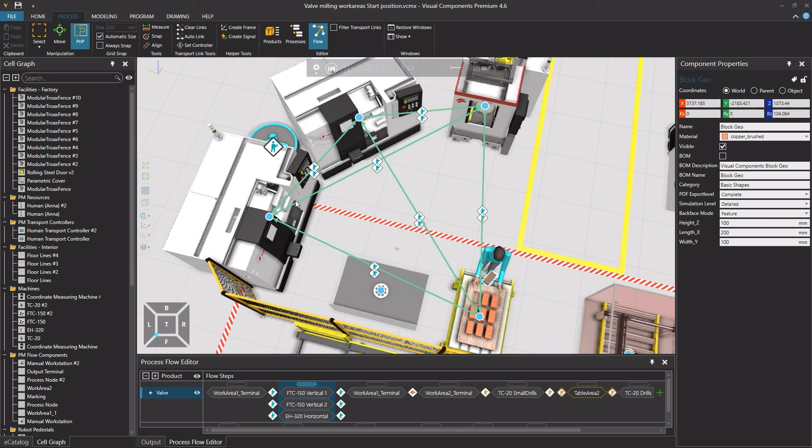Hello, JP here, and welcome to this tutorial to learn about the Assembly Operations tool. The Assembly Operations tool makes building assemblies with robots much easier and faster than before. Let's first take a look at what we have in this example layout.

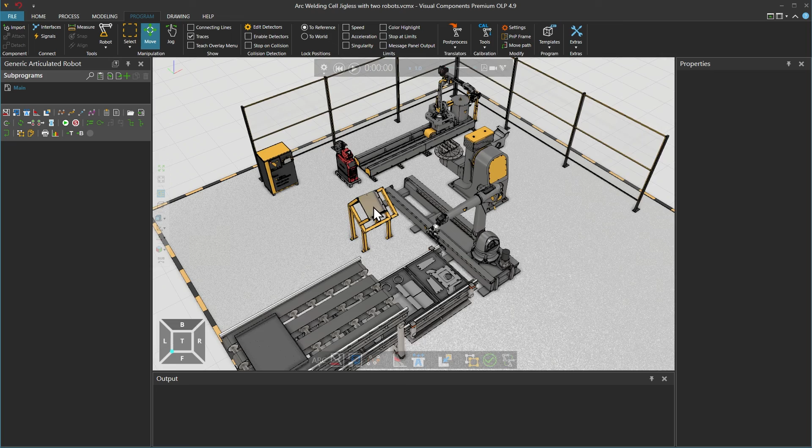Here we have a conveyor which brings these individual parts that we are assembling to this track-mounted manipulator robot. Here on the other side we have a workpiece positioner and a welding robot, which is also mounted on track. And here we have one simple but very important thing, the regrab station, which is basically a table with an angled surface and two edges that stop the parts. And last but not least, here we have the completed assembly that we have imported from a CAD file.

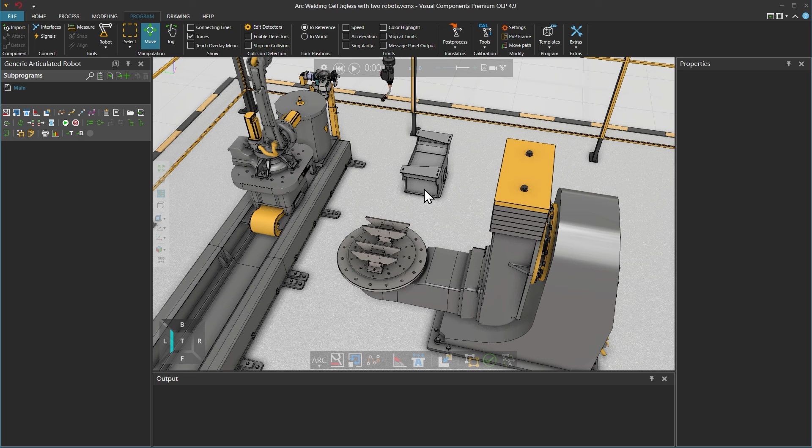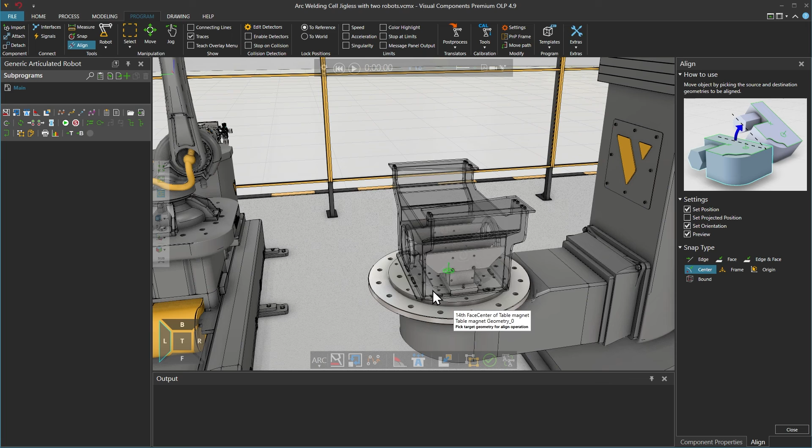Okay, let's then go through some preparation steps that will help the actual assembly operations process. First, we want to position the assembly to the workpiece positioner. So we select the assembly and use the Align tool. From the settings we select Set Position and let's use Center for the snap type. Now when we select the center point of the assembly bottom and the center point of the workpiece positioner's table, we get the assembly nicely aligned to the center.

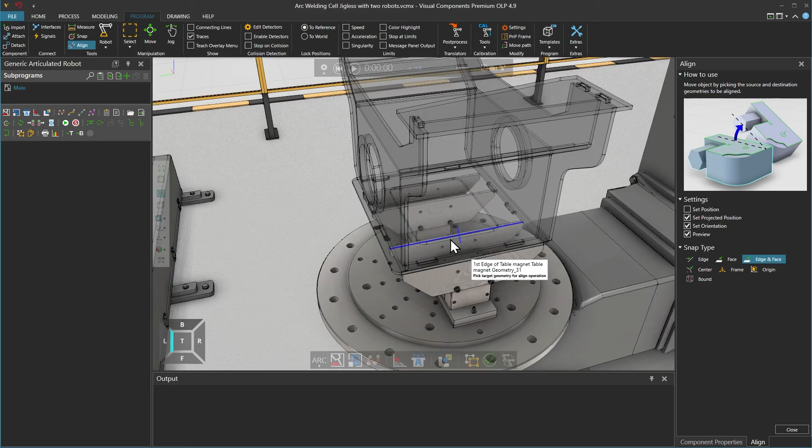Now we'll just have to move the assembly a little bit up and select the Align tool, and from the settings let's use Set Projected Position and Snap Type Edge and Face, and we'll select the assembly bottom and this face here. And it seems to be correctly positioned. Now we can use Attach to attach the assembly to the magnet on the workpiece positioner's table.

Okay, next we will create a new subprogram. Let's call this assembly helper. The idea here is that we use the Assembly Status Designer tool to define the assembly order. So we go to Extras and click Assembly Status Designer. Then we select the component, so in our case it's our assembly here.

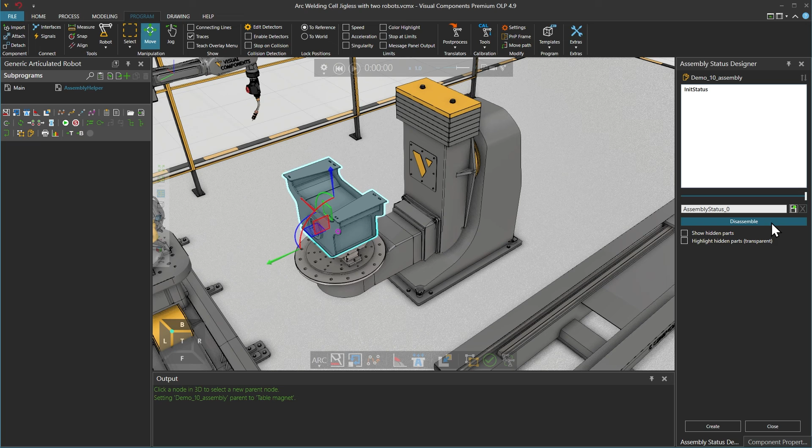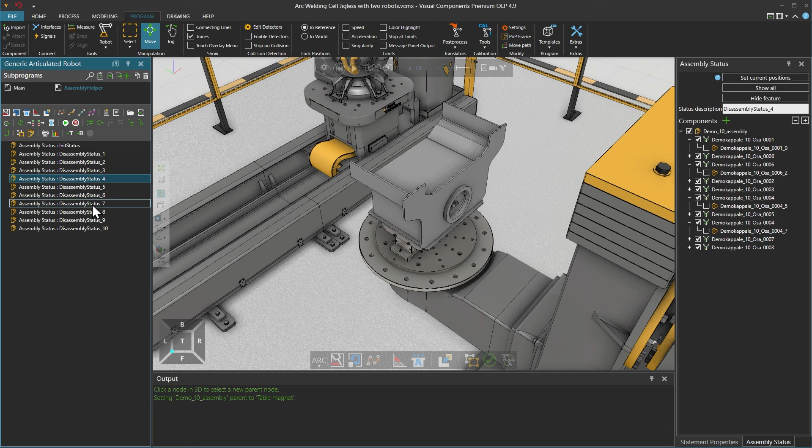Then we click Disassemble, and after that we start selecting the parts of the assembly in the order that we would disassemble this assembly. So it is actually the reversed assembly order. And now that we've gone through all the parts, click Disassemble and Create. And here we have the assembly statuses for different states of the assembly.

Then we could create two more subprograms. Let's call this first one grab part. Later, when we are grabbing a part, we will call this program. In a real situation, it would have the necessary inputs and outputs to activate the magnet gripper, but for simplicity, we just use a small delay here. Then the next one is called release part, and it is just the same, but we will call this when the part is released.

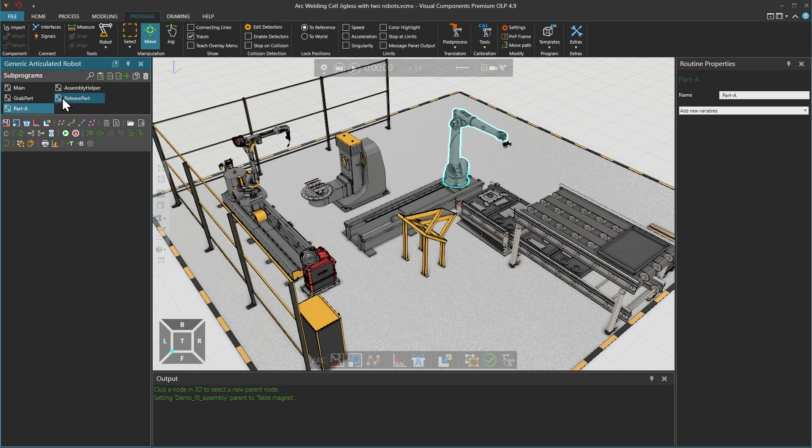Okay, now that we have all the preparations done, we can start to program the actual assembly process. We have our main program still empty, and to keep it in good order, we create own subprograms for each assembly step. So each individual part will get its own subprogram. We start with creating the subprogram for the first part. Let's name this part A. So we want to pick this bottom plate from the pallet, place it on the regrab station, pick it from there and place it to the workpiece positioner.

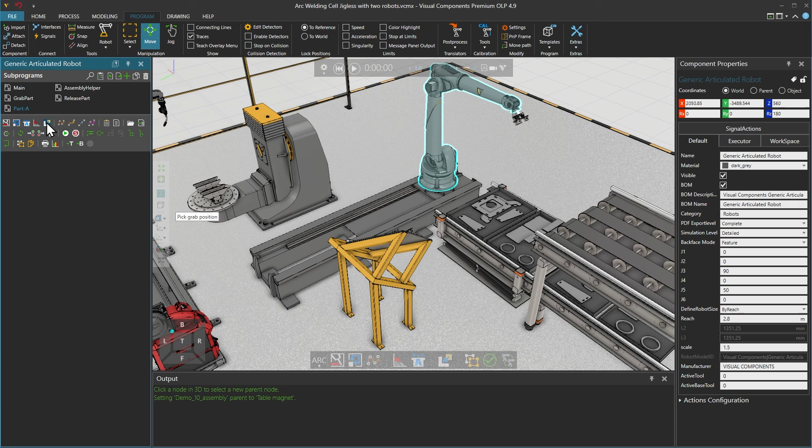To do that, we first select the robot and then select the Assembly Operations tool, either from the hover panel or from the statements toolbar here. Next, we just pick a grab position and the Assembly Operations tool creates the robot movements needed for the grab. The grab panel also appears, and from here we can scroll through the movements to see that everything is in order. Then let's take a look at the Process tab.

Here we can add extra statements to any step of the grab process. Remember the subprogram grab part that we created earlier. We want to call that when the robot reaches the grab point. So we select the grab point, click on the green plus icon here, and select Call. Now we can select the correct subprogram from the drop-down list here.

But we don't want to do this manually each and every time we pick a component from this pallet. So what we can do is go to the Database tab and create a template for this. We just have to give the template a name. Let's call this template pick from pallet and click the Save button from here. Later, when we are picking other parts from here, we can just apply this template.

Notice that when we added the call for grab part to the Process tab, it can now be seen also here in our program. Okay, now the grab statement is done and we want to create a release statement. To do that, we click Create Release Statement. From this panel, we have to choose: are we adding the part to an assembly or are we releasing it to some other location? Since we want to place the part on the regrab station, we click Release.

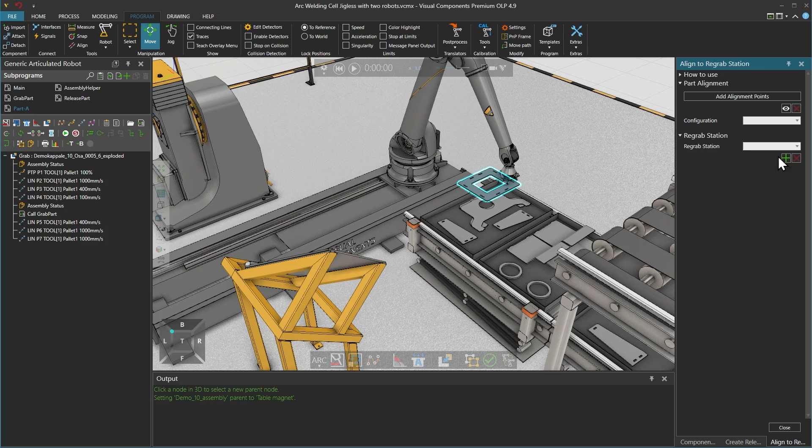Now we have to select the bottom and two sides of the table. After that, we have the regrab station available on the drop-down list. Let's select that.

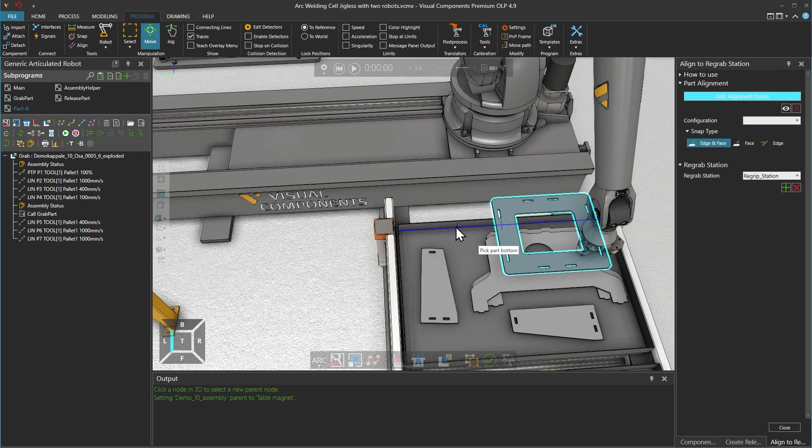Next, we have to add alignment points to our part. So we click Add Alignment Points, then select the part bottom and at least two sides of it.

After that's done, we click the Add Alignment Points button again, and now we can select the configuration here on the list. Let's check how the part looks on the table.

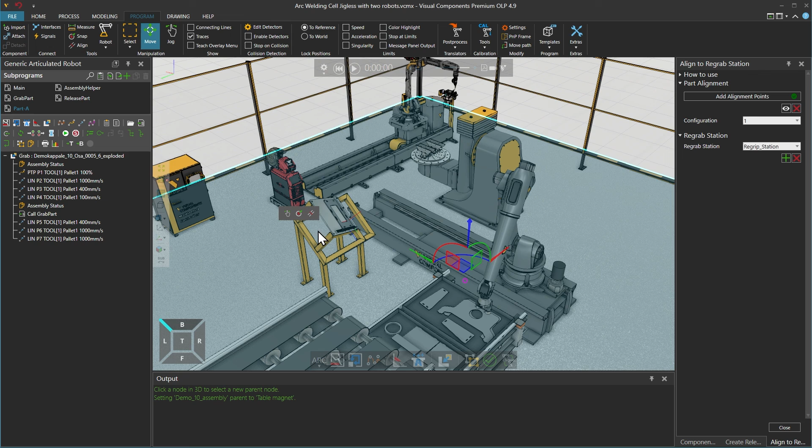It looks quite good, but if I wouldn't be happy with the orientation of it, I can add more alignment points to get more configurations available to choose from.

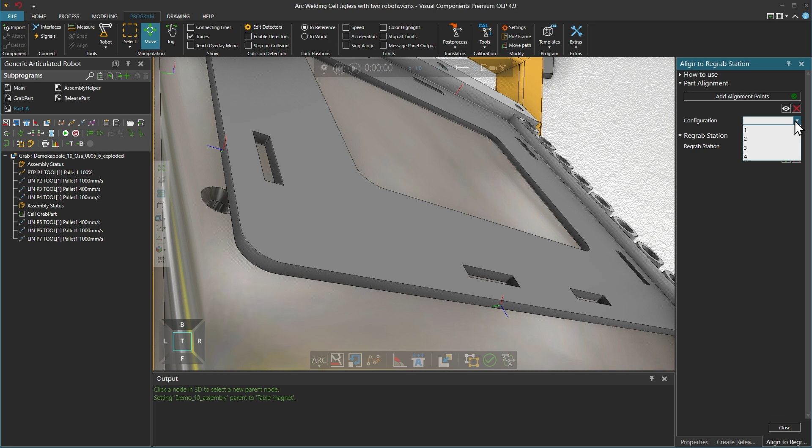So I click Add Alignment Points and select two more sides. Click the Add Alignment Points button again, and now we have 4 different configurations to choose from.

Okay, that's good. Now we can close the Align to Regrab Station panel and click Save Current Positions, and finally click Create Release Statement.

And tada! Here are the movements needed for the release. Now we just want to add our release part subprogram to the Process tab in a similar way that we did with the grab. Let's next take a closer look at the point of the program where the part is released on the table.

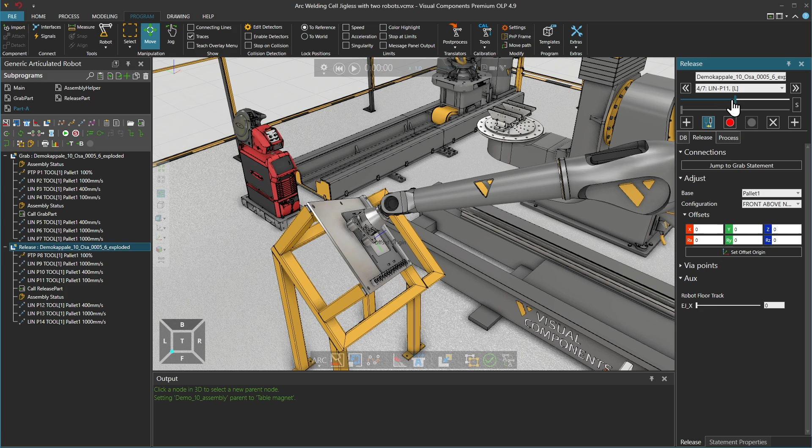The idea is that the robot drops the part on the table and gravity takes care of aligning the part with the sides of the table. So we want to apply a small offset here in every direction.

We can just click on the field and modify values by scrolling the mouse wheel. Otherwise everything looks good here, but it seems that the robot is just barely reaching the position, so we could move it on its track a little bit.

Now that everything is set up, we go to the Database tab and save these settings to a template, so that we can use this again when releasing other parts to the regrab station. Let's give this template a name and click the Save button here.

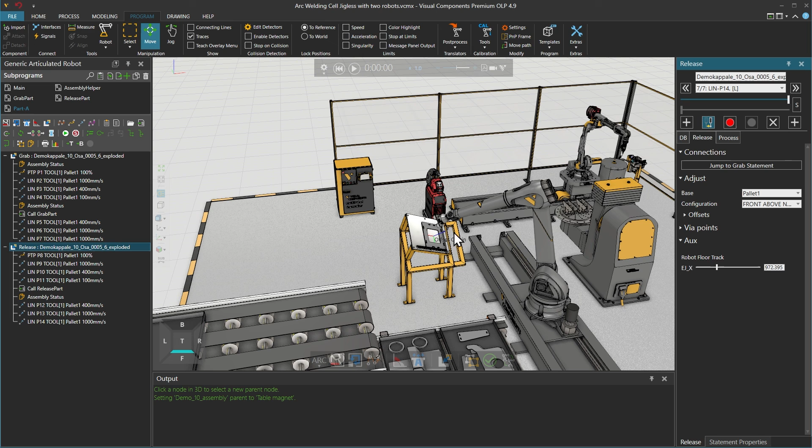Then we want to grab the part from the table and move it to the workpiece position, the location that we defined in the preparation phase. So the grabbing part of this process is pretty similar to the previous grab.

We select the Assembly Operations tool, pick a grab position on the part, and after that we can quickly review the motions. Then we add the call for the grab part to the Process tab and save these settings to a new template. After that, we can proceed to create a release statement.

So we click the Create Release Statement button, and now we want to add this part to an assembly. So we click Assembly. Now we must define to which assembly this part is added.

And this is where our Assembly Helper subprogram comes in handy. We can go to our Assembly Helper subprogram and select, for example, the first assembly status here, so that we get the whole assembly visible.

Now we can easily select the assembly by first clicking the Select from 3D World icon here, and then selecting our assembly. Next, we'll have to define which feature this part is in our assembly.

The items in this list are sorted so that the features with the most similar name are on top, so probably the first one is the right choice.

But with our whole assembly here visible, we can be sure that we select the correct feature, because the selected feature is highlighted in the 3D world. Now that we are sure we have selected the correct feature, we can hide our assembly.

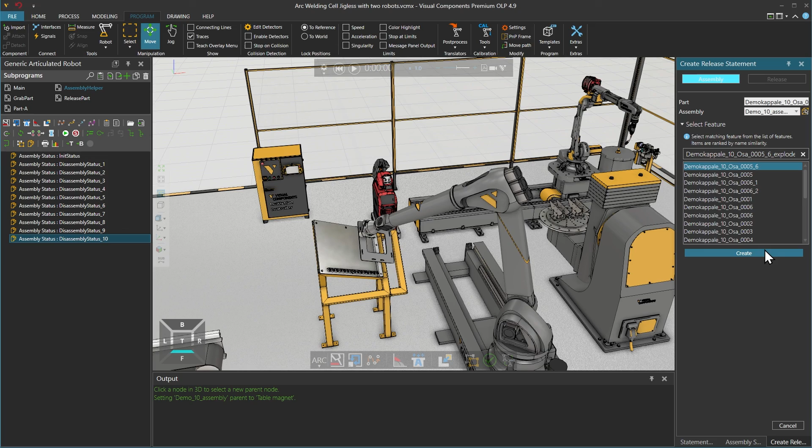Go back to the Create Release Statement panel and click Create. And now, there's our release statement.

Now we can fine-tune it a bit. Let's move the robot a bit forward on the track.

Go to the Process tab and add the call for release part, so that the magnet releases the part, and then go to the Database tab to save the settings to a new template.

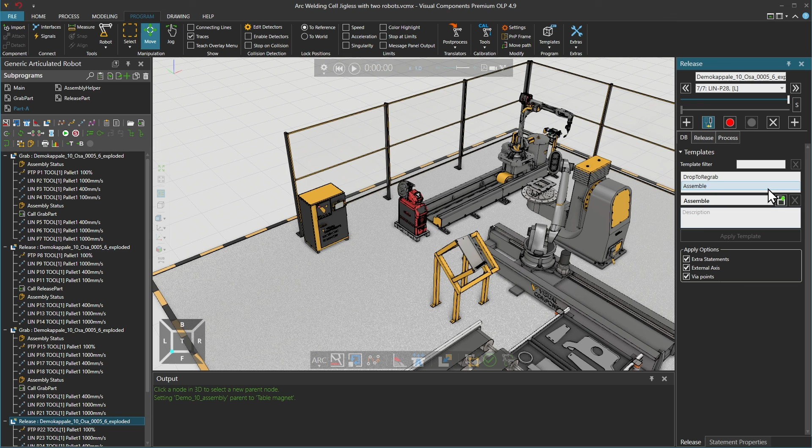And there it is. We completed our assembly process for the first part of the assembly. Let's now check how it works.

Since we used subprogram part A for it, we have to first add a call for it in our main program. So let's select our main program, add a call statement here, and select the part A subprogram from the drop-down list. And now, let's play the simulation.